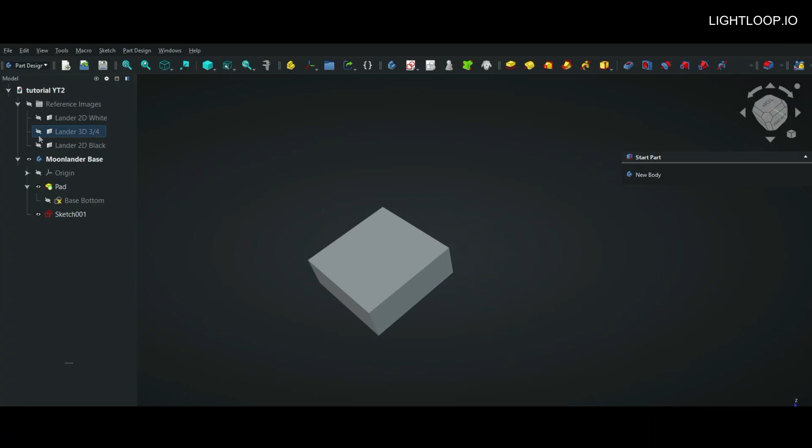Okay, so in the last tutorial, we created this box shape here. Now we're going to learn how to cut into its corners to get something that looks like this moonlander base that you see right here. As you can see, it's the same fundamental square shape, but these four corners have been cut out. That's exactly what we're going to be tackling in this tutorial.

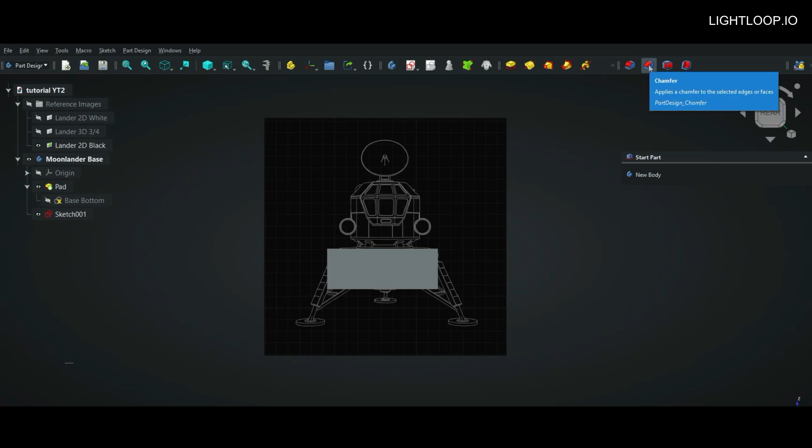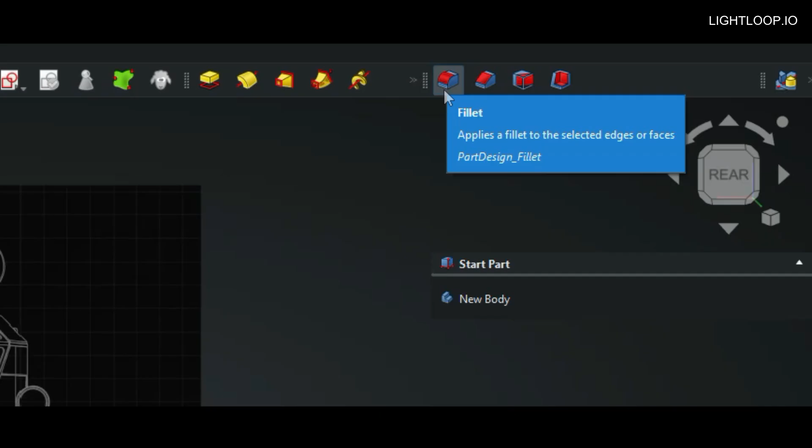Okay, so before we jump in, let's just quickly define the two tools within FreeCAD that we're going to be working with today. A chamfer is an angled cut that creates a sharp, defined transition between two surfaces. A fillet, on the other hand, is a curved transition that blends two surfaces together for a smoother, softer edge. Now, looking at our Moonlander reference here, we can clearly see that the corner cuts are sharp and angled, so we'll be reaching for the chamfer tool here today.

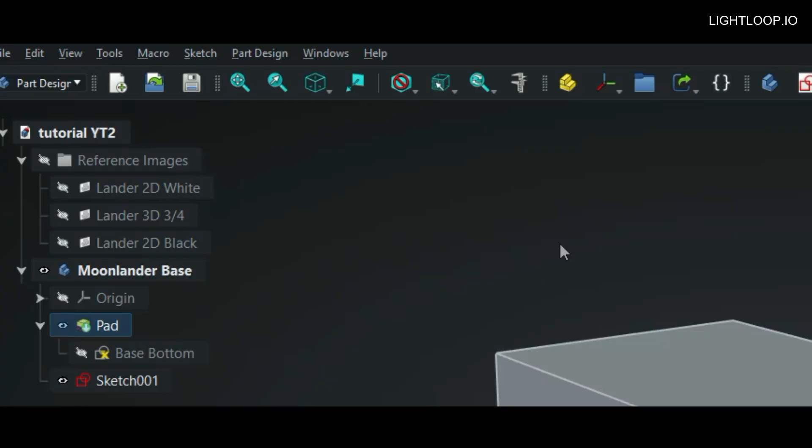Now, there are a couple of different ways to apply a chamfer in FreeCAD. The first approach is to simply select the edge that you want to chamfer. I'll select this edge here, but notice how thin it is, which makes it easy to accidentally select a vertex or a face instead. So to prevent that from happening, you can always use this selection filter up here in the toolbar, and we can set it to edge. Now with that active, FreeCAD will only allow us to select edges as we navigate around the shape. It's a handy option to know about, especially as your models become more complex.

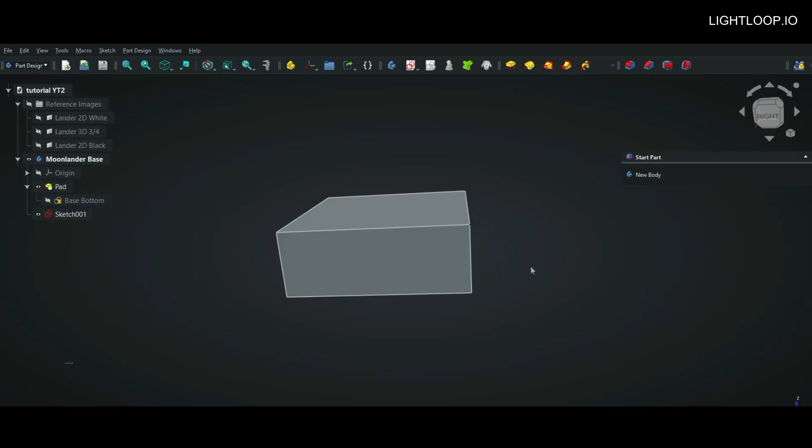But for this simple shape though, I'm just going to go ahead and turn this filter back off. So in our case, we need to apply the chamfer to all four corner edges at once. Now you could obviously just do this one by one, but since each corner will be identical, it's going to be much faster for us to just select all four of these edges together.

So there are actually a few different ways to do this. The first approach is to hold Control and click each edge that you want to select. The catch here is that these edges on the far side of the object will be hidden from view. So to get around this, what we'll do is we'll temporarily release Control. We'll rotate the object to expose those hidden edges, and then we'll hold Control down again and select these edges right here. Then we'll just repeat that until all four edges have been selected.

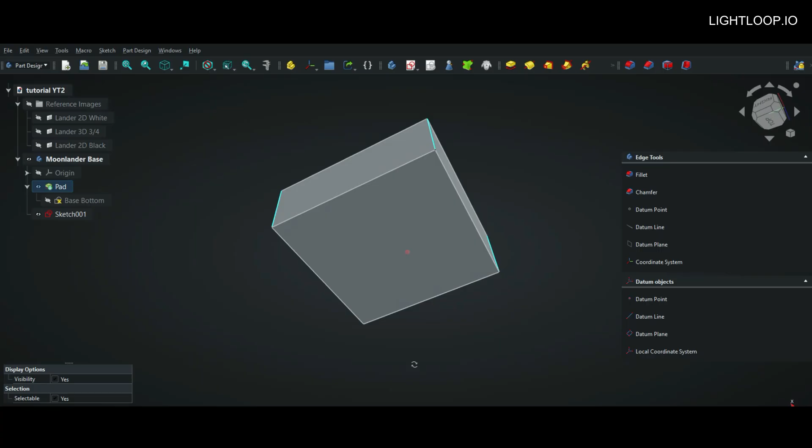Now the second approach is to switch your draw style to wireframe. With the object rendered as a wireframe, all edges are visible at once, so there's no rotating required, making it easy to select all four in one go.

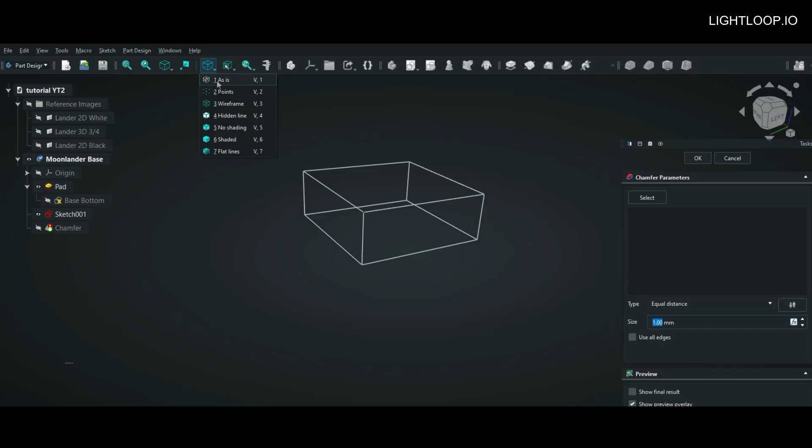The third approach is to select the chamfer tool first before making any selections. You'll notice an option under chamfer parameters right here to make a selection now. So what we'll do is we'll click on that and then we'll select our first edge, or face if we were working with faces here.

From here, you no longer need to hold Control down. You can just rotate your object and click each remaining edge. Every selection will appear in this list as you add it. So as you can see, there are a few different ways to make your selection, but in my case, I'm just going to use the first approach here.

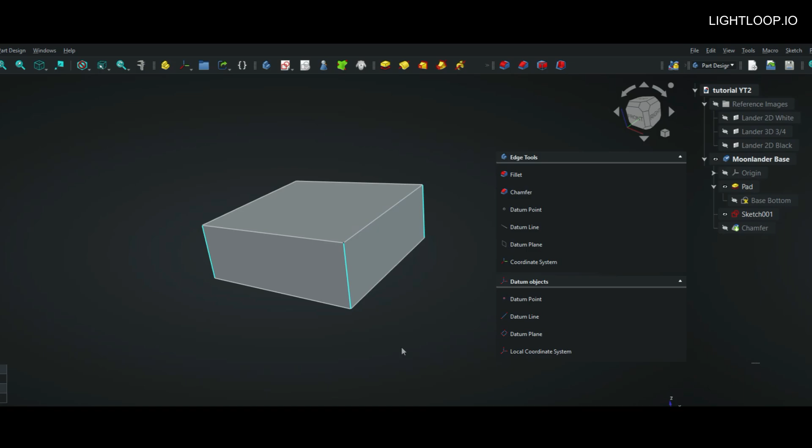Okay, so now with all four of my edges selected, we're going to select this option for chamfer, which you see right here. But also keep in mind that these same operations are also found in the top navigation bar as well. Okay, so after applying the chamfer, you'll notice all four of my edges now have a subtle chamfer applied.

Now there are two ways to adjust the size here. First, you can type a value directly into your input field, and then scroll with your mouse wheel over that field, which is a really quick way to nudge your value up or down. Or what you can do is drag the arrows directly on the canvas for a more visual approach.

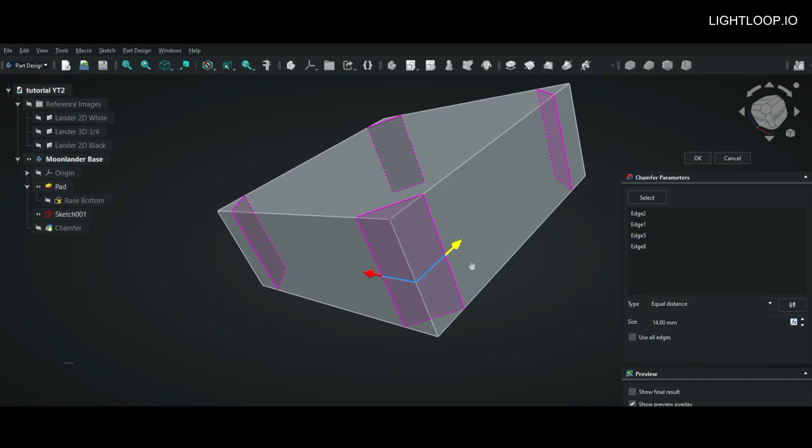Now, a couple of other options worth knowing about here. Enabling show final result will give you a clean preview of how the finished shape will look, while disabling show preview strips away the overlay. You can also switch your draw style to shaded to remove the edge lines if you wanted a cleaner view. But for now, I'm just going to set everything back to its defaults here.

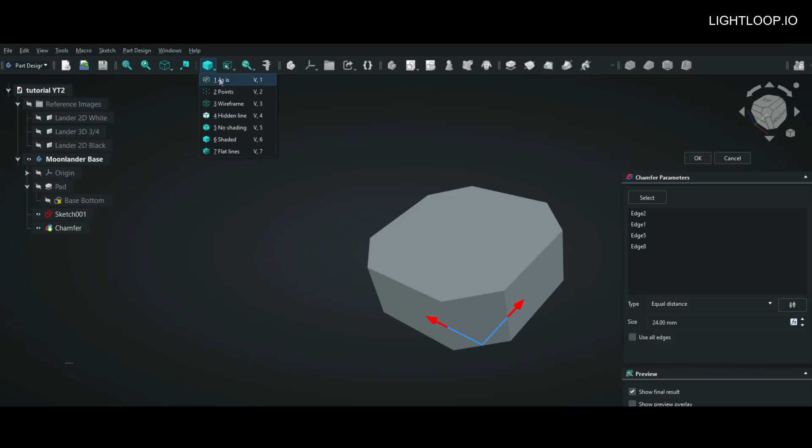And then I'm going to click on OK to apply the chamfer. Okay, now for the sake of learning, let's actually undo that. What we'll do is press Control Z, or we can click undo from the top navigation bar here, because there's something really important to know.

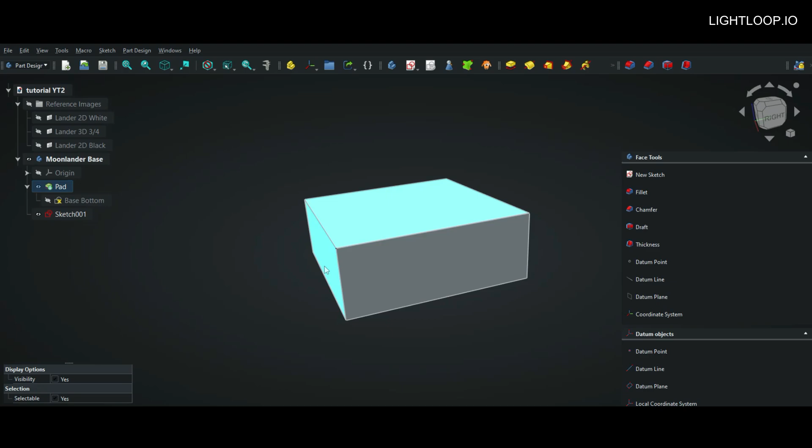And that's that when you're applying a chamfer or a fillet, you're not limited to just applying this to edges. You can apply them to faces as well. So for example, let's hold Control and select all of the faces of our object right here, and then click on Chamfer.

So here you'll see the chamfer is applied across the entire object, with the cut size adjustable in the parameters panel. Now the same logic applies to the Fillet tool as well. You can apply it to individual edges for targeted smoothing, or select multiple faces to round off the entire object at once.

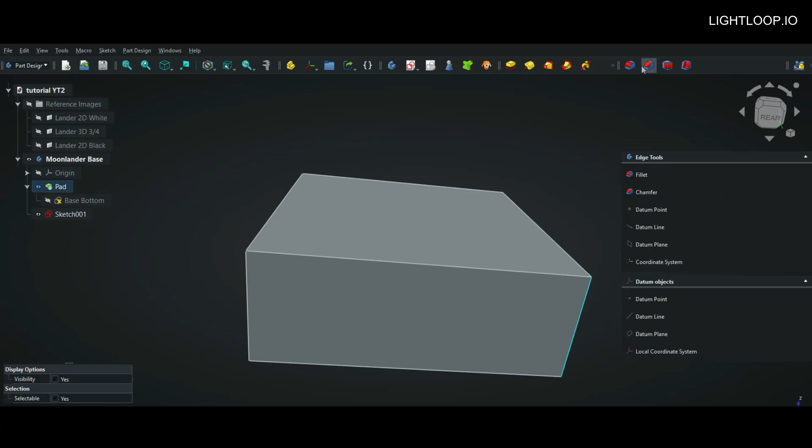Now, one last thing worth knowing about with chamfers is that up until this point, every chamfer we've applied has been symmetrical, so the cut extends equally in both directions from the edge. Now, you can change that by switching the drop down from equal distance to two distances, which lets you control each side of the chamfer independently for an asymmetrical cut.

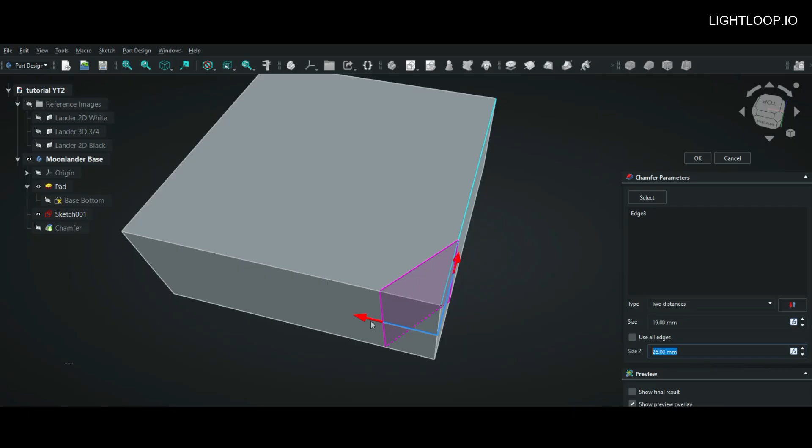Okay, so with that covered, let's actually apply this to our actual moonlander. Let's go back to our base shape and reapply the chamfer to all 4 corners. So what you can see now is that we're getting something that closely resembles the base that we've been working towards.